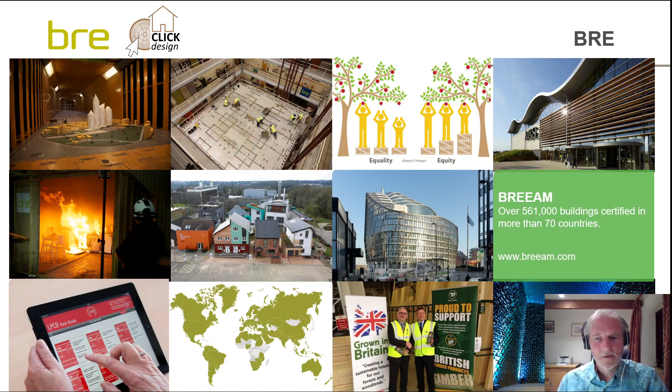For those that don't know BRE, we're a large science-based organisation headquartered just north of London in Watford, with 500 engineers and scientists working across the built environment on fire safety and performance, wind engineering, structural technology and demonstration. At the heart of it is the theme of sustainability and our sustainability standards, particularly BREEAM, our whole building assessment methodology.

So let's think first about the motivation behind the CLICKdesign project. Picture, if you will, an architectural practice office, and somebody's asking the question about how long a particular wood product will last.

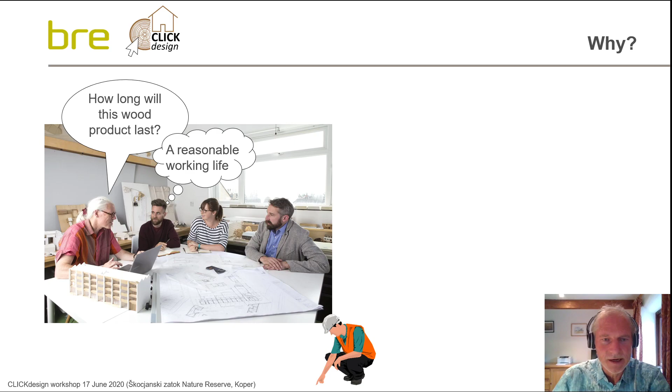The sorts of answers or things that people might be thinking about are quite varied. A reasonable working life is something written into certain standards and guidance documents. Certainly the product literature for certain products and innovations might have particular views on service life and performance aspects of the products. And then there's a whole diverse range of European and ISO standards, both from a technical durability point of view, but also from a service life planning and performance point of view, that can offer some guidance or views on service life and performance.

But the combination here presents quite a confusing picture to the construction industry.

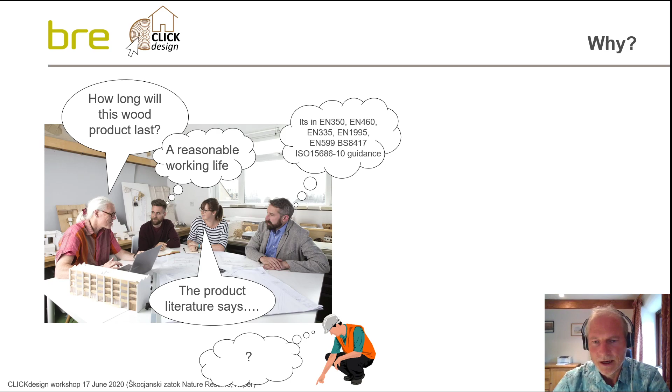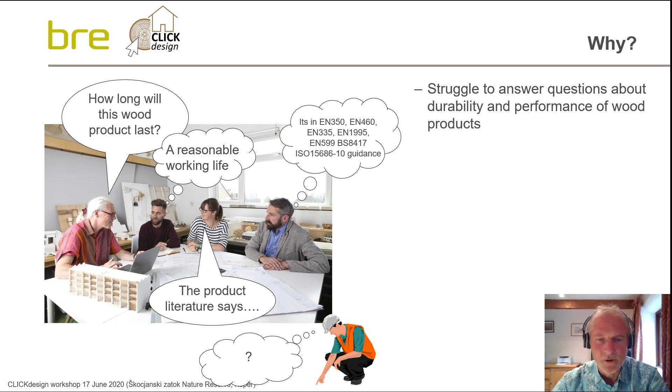If we're struggling to answer questions about durability and performance of wood products in construction, this has a number of risks associated with it. It can potentially provide disadvantages for timber compared to steel, aluminium, plastic and concrete and other materials, who may well have quite advanced software in order to determine performance aspects of these relatively homogeneous materials.

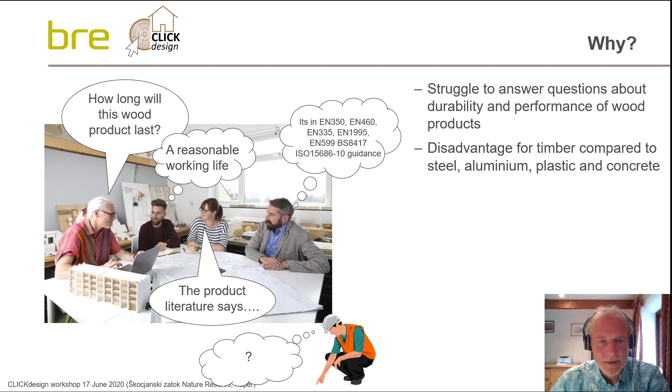In addition, if we think about technical specifications in building information modeling, so BIM, and also in life cycle analysis, which is critically based on service life data, if we can't answer those kind of questions for wood products, then again potentially we are technically disadvantaging wood products in those systems and structures that many are familiar with now.

And then finally, there is this point we wish to avoid, of course. We want to get the right products in the right place, so meeting expectations. Unfortunately, our disadvantage at the moment, if we can't answer questions on performance, is that we run the risk of having the wrong product in the wrong place.

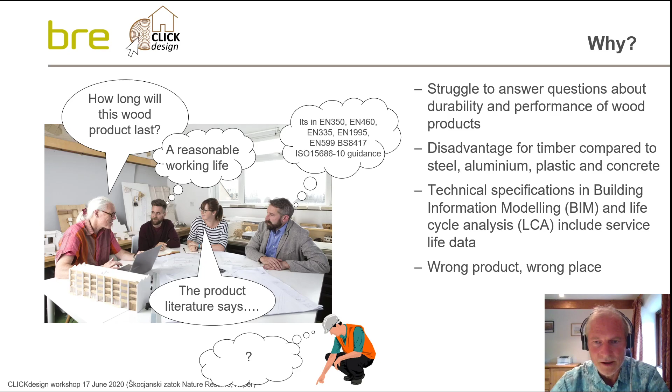So what is the CLICKdesign project? The ultimate objective is to develop a software tool for architects and specifiers to enable performance specification for wood, moving from this rather complex, fragmented and general position that we have at the moment to provide an easy to use, consolidated and specific tool in an accessible form.

So within it, the CLICKdesign tool will combine decades of research, the complexity of the standard specifications that already exist, but it will also critically enable a variation of approach due to traditions, materials, and cultural aspects across Europe. It is funded by the Forest Value Programme.

There's a link there in the presentation. The Forest Value Programme is an amazing collaboration of national funding organisations from across Europe, and they're currently funding 17 research projects in the forestry and wood sector, of which CLICKdesign is one. So do have a look at that website, there may be some more projects of interest to you.

So we're just over a year into our project. It began in March last year and will conclude in February 2022.

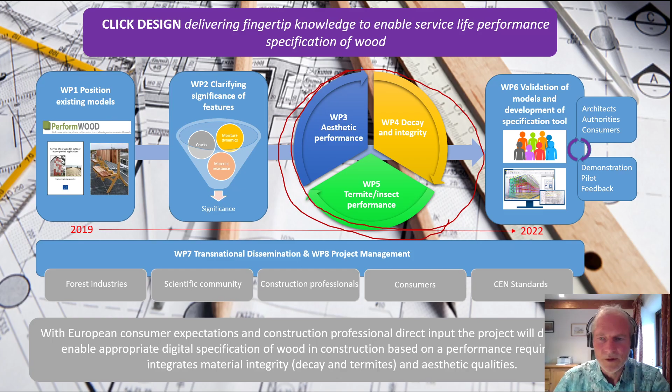As I mentioned, we're going to have a little look now more closely at the components within the project. First of all, work package 1, which is all about positioning and the existing models. So much of this work has completed. It has surveyed and critically reviewed the existing models to identify strengths and weaknesses.

A comparison has been made between the existing models in terms of hygrothermal properties, biophysical decay, material resistance, and engineering design. And critically as well, it's studied the comparison of available input data, so the consistency in the variables that go into these models, and how the output data from a model might contribute to what we're calling our superior model, which is where we bring all this together.

So that's a really important task. Much of that work's been completed. We're very lucky as well also to have Christian Brischke, of course, on the agenda today at this workshop.

Who'll be talking about the modelling of the durability and service life duration of timber structures. And just some of those illustrations there show some of the projects and programs that have gone before and really have developed the platform to enable CLICKdesign to move forwards.

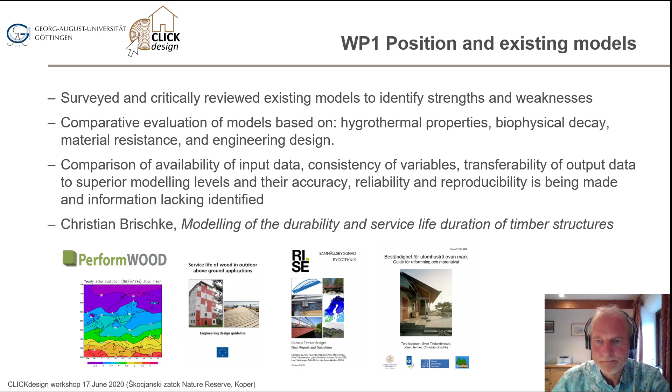So the Perform Wood project, Woodexter, the Wood Build project, and the Dura TB, Durable Timber Bridges program. Really building upon that past work.

The second task is, having looked at those existing models, is about clarifying the significance of missing features. So existing models, by the virtue of their structure and how they've developed, of course can't cover everything at this point. So we have an opportunity, and this work's being conducted, again being led by the University of Göttingen, looking at filling in those gaps.

What are those features that are missing that we think are quite critical in terms of the performance of wood in structures? For example, that includes looking at the impact of cracks, of weathered material, of material resistance, adaptation to in-ground situations, microclimates, the growth of vegetation around wood products in our buildings.

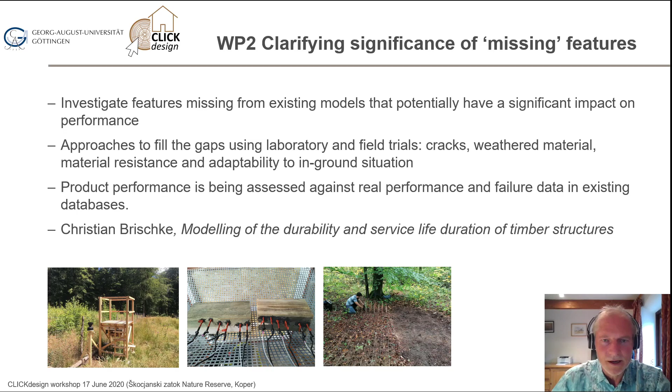And that product performance is being assessed against real performance and failure data in existing databases. So again, it's this opportunity to mine databases that already exist and extract that information that's really, really useful for us in terms of our modelling work. So again, we're very lucky to have Christian with us today to talk about some of those aspects of his work and indeed the work within CLICKdesign.

So it's turning this into real data to help us define the aesthetic limits, focusing on characterization of aesthetic aspects of building materials, numerical modeling of those visual changes as a function of deterioration and time, and numerical model mapping of the weather dose that the building surfaces are receiving. This is a critical component for integration into building information modeling, to help designers and architects understand the impacts of designs and how they might look after particular periods of weathering.

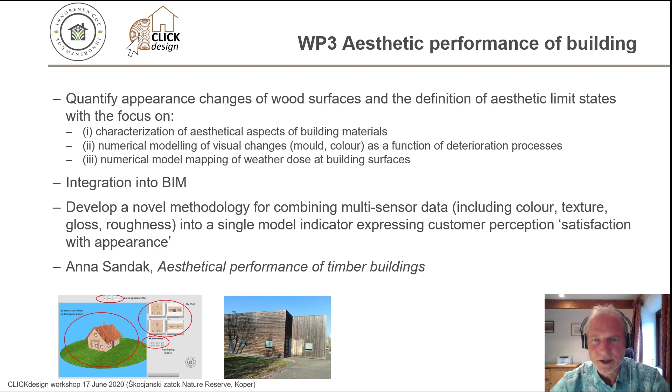The task is going to develop a novel methodology for combining multi-sensor data, including color and texture, roughness, etc., into a single model indicator expressing customer perception around satisfaction with appearance. So this is a real people-focused task as well. We're delighted to have Anna Sandak talking about the aesthetical performance of timber buildings on today's agenda, which is great.

Work package 4 is the impact of decay on integrity, led by VTT in Finland. This is primarily about understanding the effect of fungal decay on strength and stiffness of timber structures. Experimental studies are being conducted on the spatial distribution of decay in timber under lab conditions, considering material climate and collection of hygrothermal properties of different materials and wood species for finite element analyses, which will predict distribution of moisture, temperature, relative humidity inside the wood, as well as moisture gradients across sections.

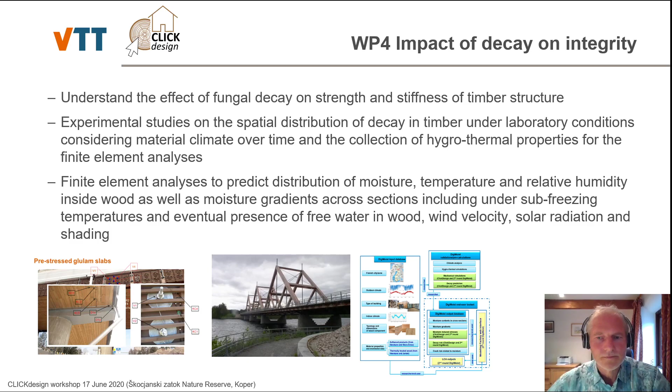Work Package 5 is a measure of termite and insect performance. This is the third component that comes together in our modelling approaches, and it's being led by FCBA in France. So studying the adaptability of existing models to create a measure of insect and termite performance to contribute to our superior model. What parameters are being identified that will influence insect risk - climate, moisture, accessibility to termites - and study of the performance of selected model construction materials against subterranean termites.

So again, very practical laboratory test work, but also gathering information from right across Europe about insect risks. This will also, as all the work will be, be validated against reality checks for any of the performance measures that come out from the work.

We're very pleased as well to have Magdalena Kutnik from FCBA on the agenda today, who will be talking about these emerging risks for insect infestation in timber structures, particularly around climate change. One of the things we're doing is mapping those risks across Europe, but we need to be mindful of the impacts of climate change and the possibilities of enhanced distribution of insect risk across Europe.

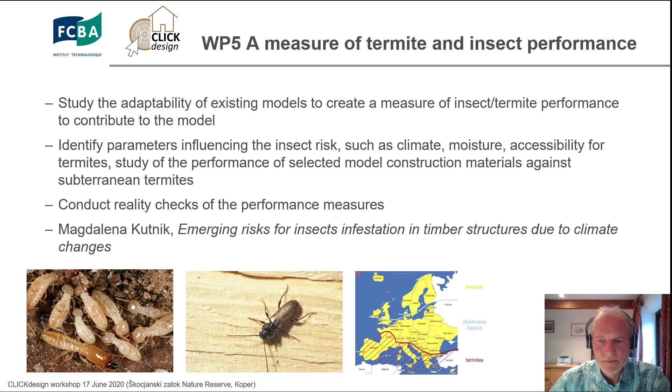Work Package 6 is being led by Lund University, and is around the validation of models and development of the specification tools. In a sense, this is the real beating heart of the project, where the work from all those previous work packages comes together, developing numerical models on the basis of the results from those previous work packages.

Critically, those models will be validated against real case studies from across Europe - real buildings, real construction products, real structures - and the validation of those most promising performance models under different scenarios for different structures and products. The scenarios will vary with climate and exposure situations, biological hazard presence, the materials used, whether that's untreated wood or modified wood or preservative treated, the design, and the performance type and limit states - whether features will be focusing mainly on aesthetic performance, functional or mechanical, or across all of those.

The primary output is going to be the development of the CLICKdesign tool from this work package, and its integration into BIM. Today on the agenda is also a presentation of these prototype software tools developed so far within the framework, which has been really helpful. Lund started quite early on in this project to develop a prototype, so we've been able to review and adapt that as more information and data comes in. That will be a critical part of what we do when it comes to piloting and testing the model with the industry group and groups of architects.

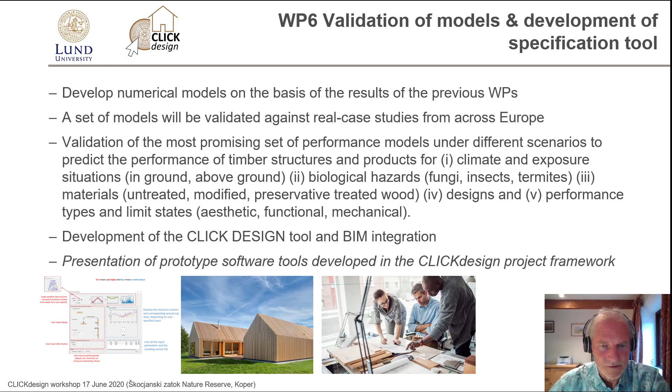So in summary, it comes together in this rather complex diagram, and you can see it's a series of different models that come together. Our exposure model, our decay model, the resistance model of the material, the insect model, the aesthetics model, and the strength model. And all those elements come together and, of course, interact into Work Package 6, and then ultimately the outcome, our CLICKdesign specification tool.

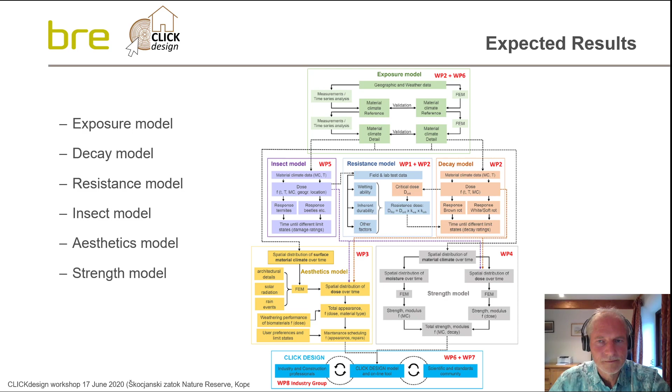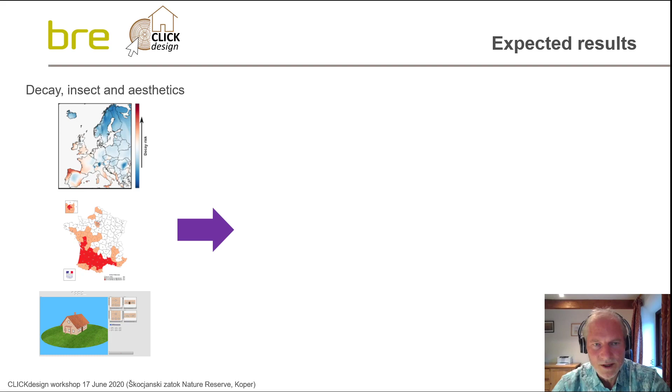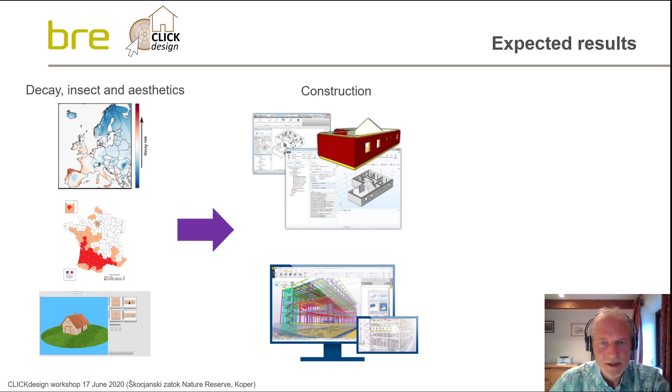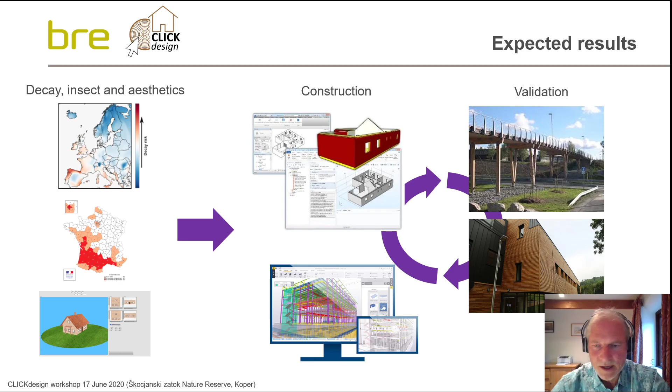So our expected results, just to reinforce, we're primarily bringing together decay, insect, and aesthetics. So those three qualities come together for the first time in a modelled system around performance for wooden construction. And that will be run through our CLICKdesign tool and integrated into building information modeling standards to enable ease of uptake. And critically, of course, it will be validated both within the terms of the project against buildings and structures, but also through the use by architect groups and the industry group.

Exploitation, of course, of these projects and programs is critical. We want our research, and the funders want our research to have maximum impact, and of course that links into how we're going to exploit it. So on the left-hand side you can see our research organisations and industry group, the project, and our 4 main targeted groups that we are reaching. So construction professionals, as I understand it, that will be people like yourselves in the audience today. The forest-based industries, again, some of you will be part of the audience today. That's a critical group, of course, because it allows for adaptation and innovation.

Standards and authorities, so we want to embed what we know and what we learn into the standards that get developed and issued, that shape and craft the built environment across Europe. And then our 4th group, of course, is citizens. I mentioned our objective right at the beginning of trying to ensure we get the right wood product in the right place. And we have this opportunity in this project to help European citizens with that and to make that a little bit easier for them through a public-facing, simple tool.

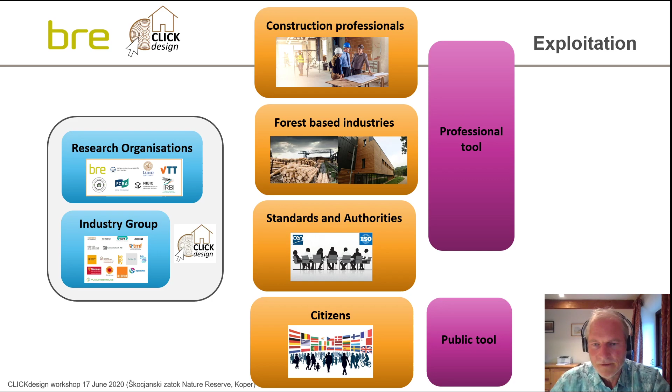So we've got our professional tool, which is going to be for those primary 3 groups. It may indeed include authorities and regulators as well. And then we have our public-facing tool, which will be directly for European citizens. We're exploiting it through transnational communication. We have plans around training and education and workshops. Of course, we're validating it with pilots and case studies, and we have input into our standards committees, both within CEN, European standards, and international ISO standards.

Our public tool, we're going to reach out through social media conversations and have a campaign supporting that. That primarily is going to focus on how long will it last, or if you like, how long do I want it to last? So that might be for fencing products, for decking, for cladding, for some of those kinds of projects that the public get involved in.

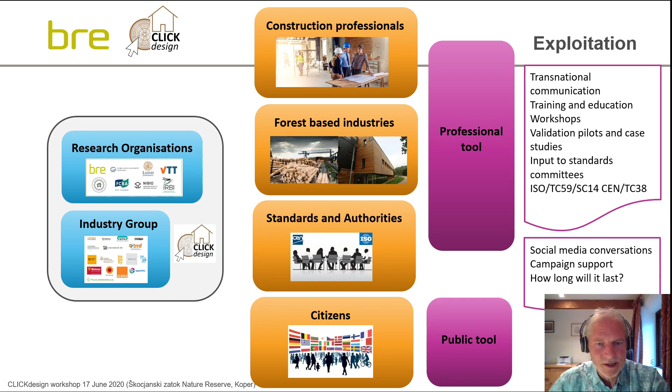We've done quite a lot already in our first year around these transnational dissemination ambitions, both working with groups of organisations, informing about the programme and the project and where it's heading, publications and articles across the academic press, but also the industry press and the forest-based sector press. And then, of course, we've got our LinkedIn groups and social media as well, which is helping support some of our public outreach. We're, of course, very open to suggestions where we can do more. Part of that is at today's event, but of course we're delighted to write articles and to present particularly to industry groups across Europe. So yes, please do come forward if you have some ideas or thoughts about that.

Some of the coming highlights. So we are increasing our influence on standardization work. So that's primarily in CEN committees at the moment, particularly through working group 28 of TC38, which is focusing on performance classification of wood. So that's really underpinning this ability to specify the performance of wood products through European standards.

I mentioned just a moment ago, in the next 6 months, we'll be issuing our public-facing tool. So that will be issued on our website, free to access, which will enable selection of the right wood product and the right end use. We're also utilising our wider European networks to get that publicised and used across a broader European perspective than the partnership. And that will partly include some of the text being translated into all the national languages of the European Union.

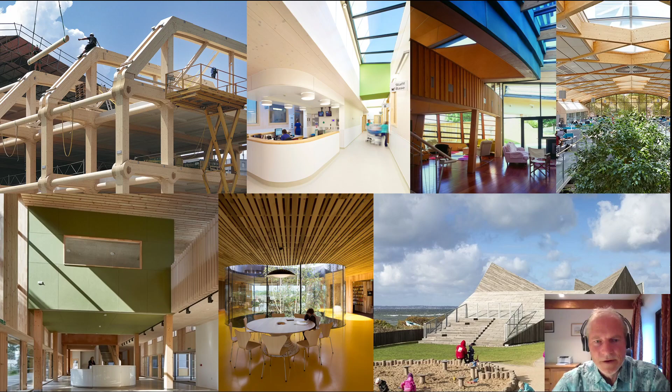We collectively believe as well in the incredible opportunity for timber and construction. In times of climate emergency, the material that has the lowest embodied carbon should be the preferred choice. We know there are a number of issues that can hold timber back, and we are firmly tackling one of those around performance and durability.

So one of our really broad ambitions is to underpin the continued growth and use of wood in construction in this incredible array of forms and materials and products across Europe that you can see in these few illustrations and many, many more. And then that leads us nicely on to our impact, so our project impact. Fundamentally, we want to increase market confidence with users for selecting wood as a reliable product. So this is about enhanced performance of timber in the built environment, but an understanding of performance of timber in the built environment.

Clearly, we are looking for a resilient future, so adaptable for features not yet integrated into specification. We know that climate change will have a significant impact on some of the challenges presented in the built environment around performance, and potentially, as we saw earlier, around insects and distribution. So we want to have a system that can adapt to that and integrate to ensure a resilient future.

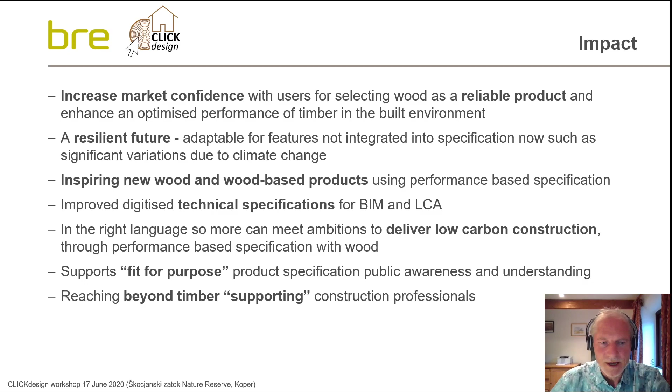So our request to you, just to wrap up, is please stay in touch as we work further on piloting the tool and creating a more confident performance-based future for wood in construction. It would be great if you wanted to get in touch to join our industry group and to help us shape and steer and test that tool over the next 18 months.